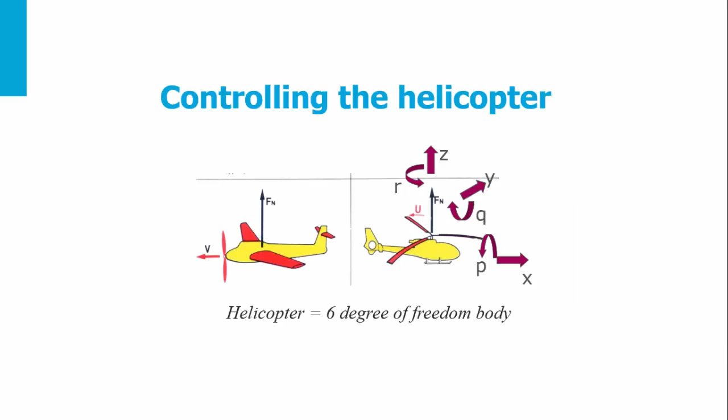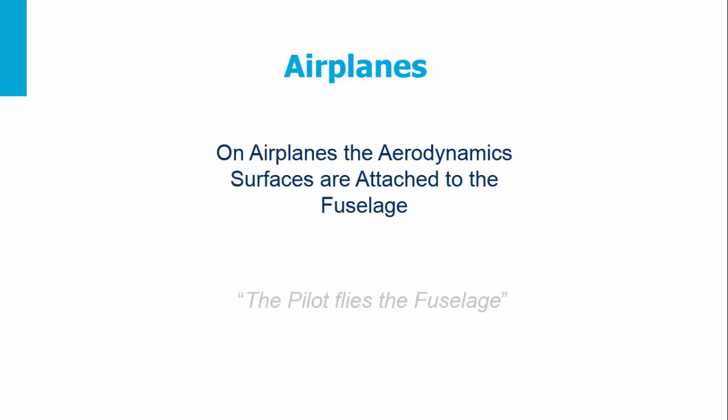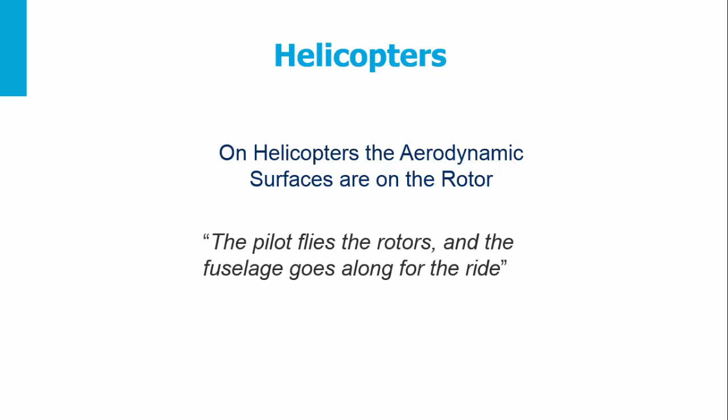Helicopter is a 6 degrees of freedom body and needs to be controlled in all its axes. On an airplane, the aerodynamic surfaces are attached to the fuselage, so the pilot flies the fuselage. In a helicopter, the aerodynamic surfaces are on the rotor. The pilot will fly the rotor and the fuselage will go along for the ride.

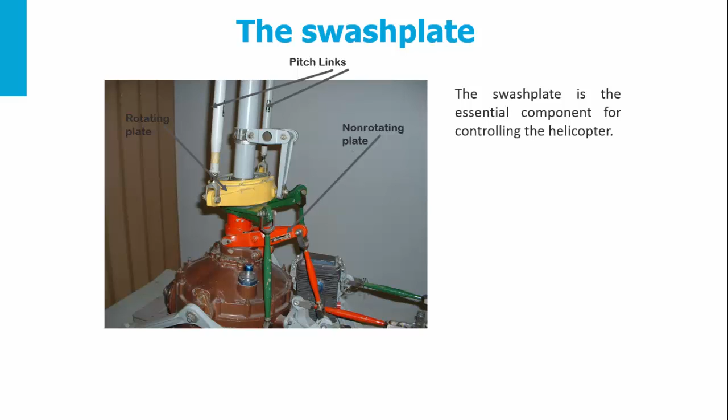The most important component of a helicopter rotor is the swash plate. The swash plate consists mainly of two parts: a non-rotating plate that you see in a figure and a rotating plate. This rotating plate is a control plate which not only slides along the rotor shaft but may move in all directions about its spherical bearing.

In a figure you see the pitch links which are connecting the rotating swash plate to the blade, or more exactly to the pitch horns.

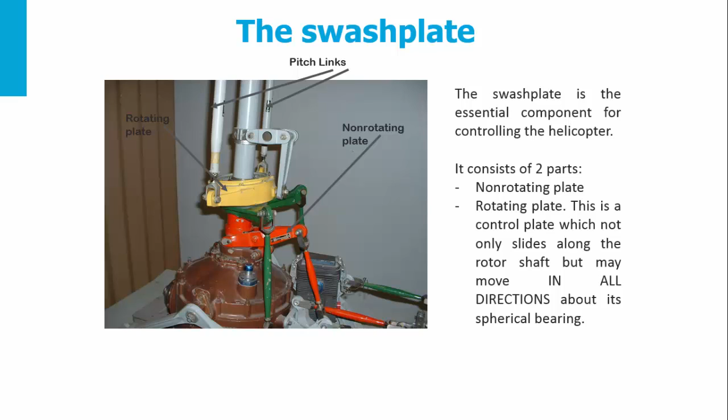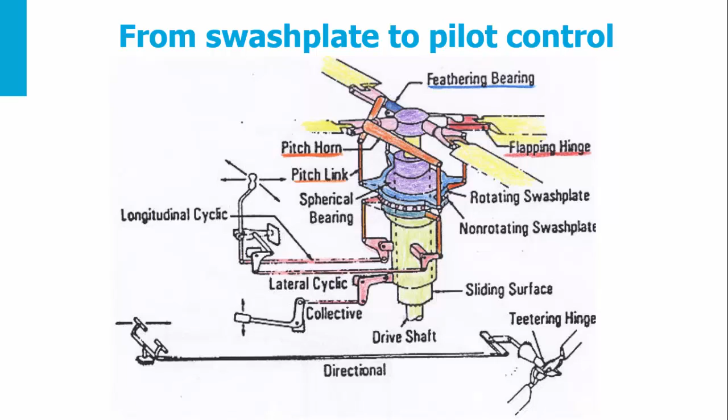In this figure you see how the pilot controls go to the swash plate mechanism. You see the helicopter pilot controls: collective, longitudinal cyclic, and the pedals, and all these going to the non-rotating swash plate and then transmitting the motion to the rotating swash plate.

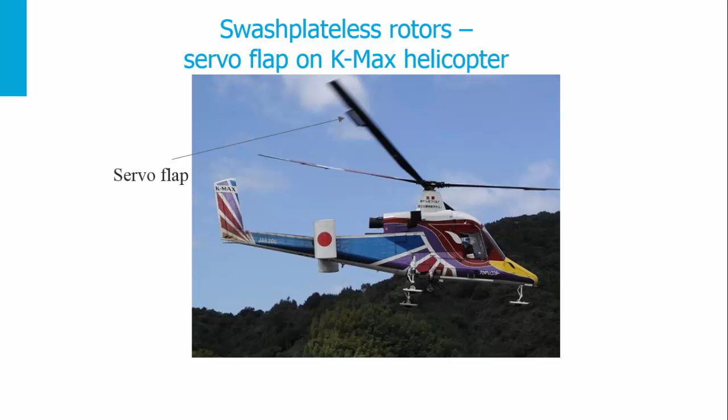Today, there also exist swash plateless rotors. Example, the K-MAX helicopter with servo flaps. A servo flap is a small airfoil located at about 75% span of the rotor blade, situated on the trailing edge of each rotor blade. These flaps are controlled by the pilot exactly like in fixed-wing airplanes. Moving the servo flap upward increases the rotor pitch and causes the helicopter to climb.

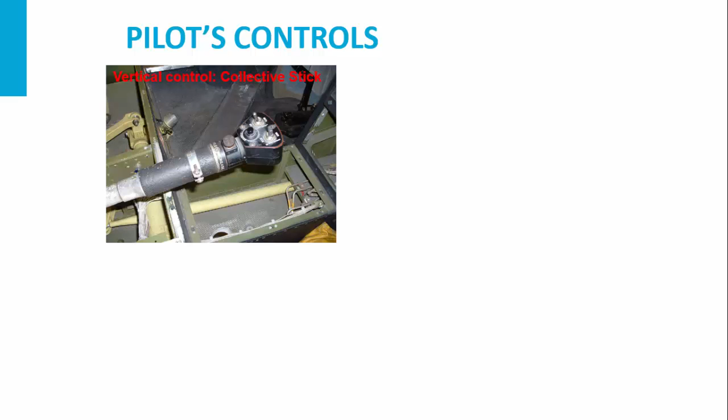We are going to discuss the pilot controls. The pilot controls are as follows. For the vertical control, we can use the collective stick. This is located on the left-hand side for a pilot seated on the right side. Sometimes the collective stick also controls the RPM of the rotor by a twist grip.

Then, the longitudinal and the lateral control is achieved by using the cyclic stick. This is positioned in front of the pilot and can be used to tilt the swash plate. The yawing control is achieved by the pedals.

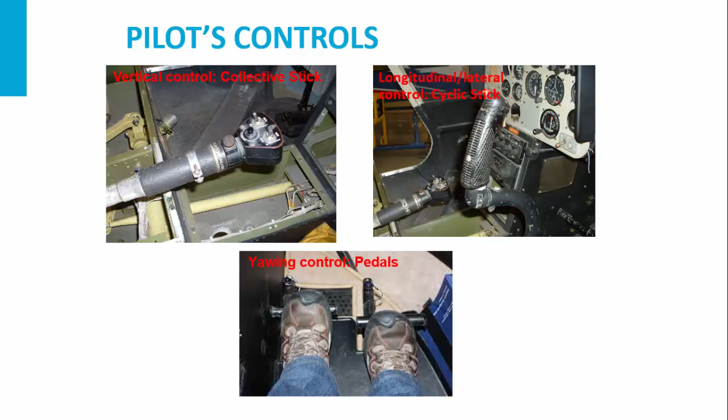Let's concentrate on each control. First, the collective stick. When the collective stick is applied by the pilot, it will result in the following: for 1 inch collective stick, the non-rotating swash plate will rise. This is connected to the rotating swash plate, which then is connected through the pitch links to the pitch horn.

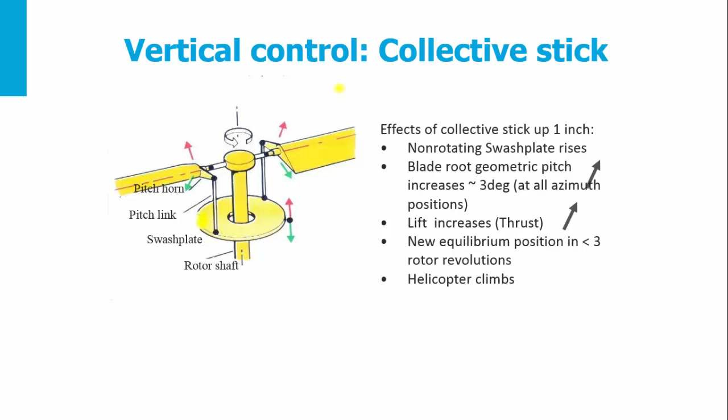As a result, the blade root geometric pitch will increase at all blade azimuth positions, approximately 3 degrees. The pitch is increasing, the angle of attack is increasing, the lift is increasing, so the thrust force on the whole rotor is increasing. A new equilibrium position is achieved in less than 3 rotor revolutions, and this results in a climb of the helicopter.

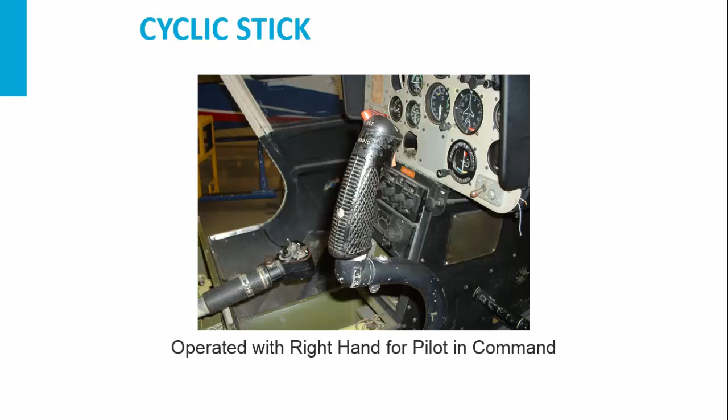The cyclic stick is operated with the right hand for pilot in command. When one is moving the longitudinal cyclic stick forward, the rotor disc will tilt forward, the thrust force will tilt forward, and the helicopter will pitch down and move forward.

Equivalently, for lateral control, the cyclic stick to the left will result in a helicopter rolling and moving to the left.

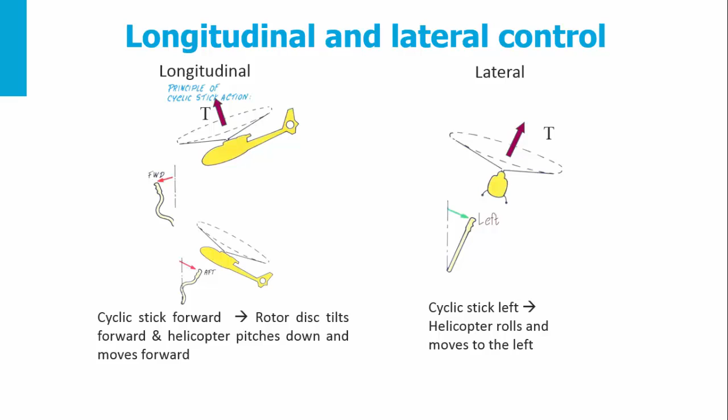What happens on the swash plate after giving a cyclic pitch? You see here the helicopter rotor and the different blade azimuths. For a cyclic stick forward, the non-rotating swash plate will tilt forward.

The pitch horn is connected to the advancing blade of the helicopter. The advancing blade is actually the blade which is situated at 90 degrees azimuth and is advancing with the rotor. As a result, the pitch angle on the advancing blade will decrease to a minimum. This will result in a decrease in the angle of attack and a decrease in the lift force.

Opposite, on the retreating blade, situated at a 270 degree azimuth angle going to the back of the helicopter, the pitch of the blade will increase. This results in an increase in the lift force. As a result, you would think the rotor disc will tilt laterally. But due to gyroscopic effects, as we apply a force on the rotor, we get the response 90 degrees later, resulting in a forward tilt of the rotor. As a result, the helicopter will pitch down and move forward.

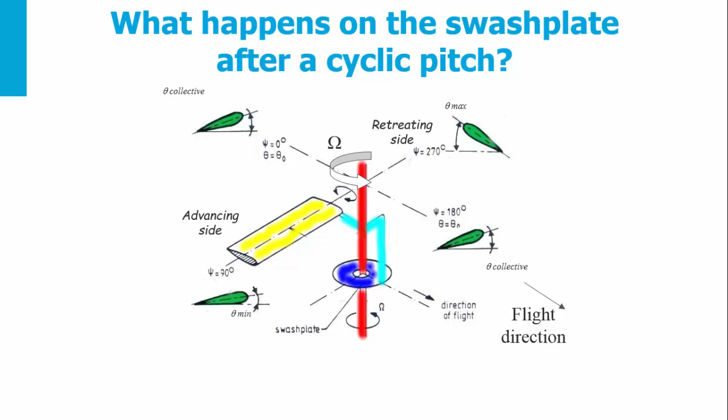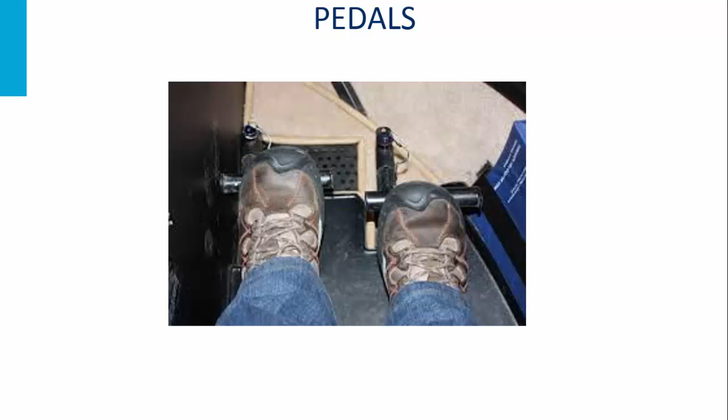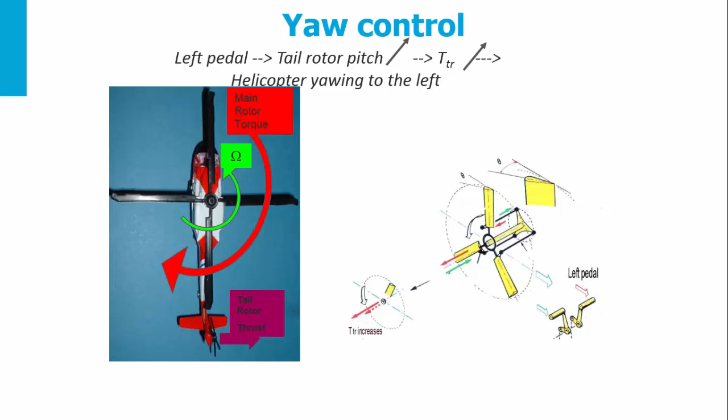Understanding this mechanism, we can go to the pedals. The pedals control the yaw. For example, if we give left pedal, the tail rotor pitch will increase, the thrust on the tail rotor will increase, and as a result, the helicopter will yaw to the left.

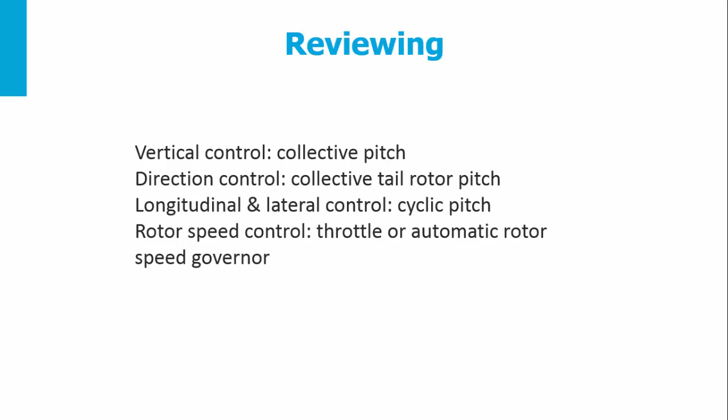Reviewing: vertical control is achieved with collective pitch. Directional control is achieved with tail rotor collective pitch. Longitudinal and lateral control is achieved by cyclic pitch. Rotor speed control is achieved through throttle or an automatic rotor speed governor.

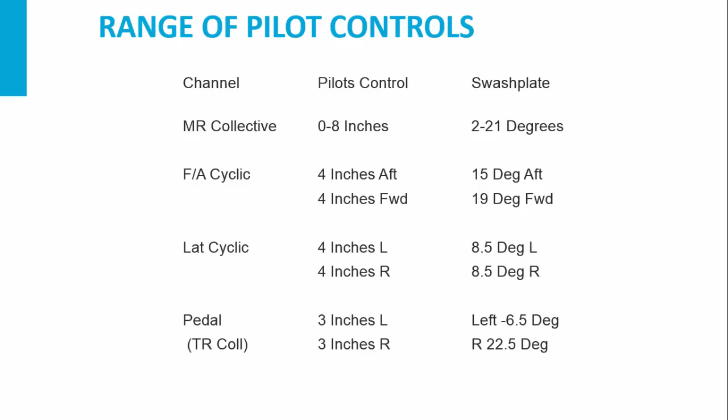The range of pilot controls are given in this table. Applying the collective main rotor, a 0 to 8 inch pilot control results in a swash plate pitch between 2 and 21 degrees. A cyclic forward-afterward of 4 inches results in 15 degrees aft and 19 degrees forward of the swash plate. A lateral cyclic of 4 inches left-right results in 8.5 degrees left-right. And for a pedal, 3 inches left-right results in 6.5 degrees to the left and 22.5 degrees to the right in a counter-rotating helicopter.

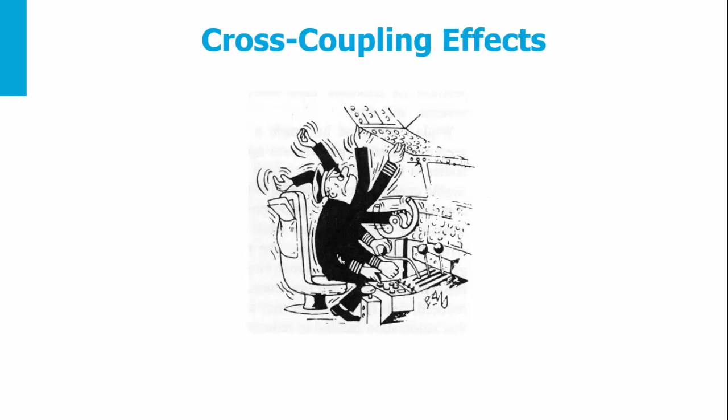There are many cross-coupling effects in helicopters. Some of the most important are presented here. First, collective is coupled to the yaw control. Why? Imagine the pilot is moving the collective lever. This causes a change in engine torque, which changes the reaction torque. Therefore, one needs to apply more pedal to prevent the helicopter from yawing.

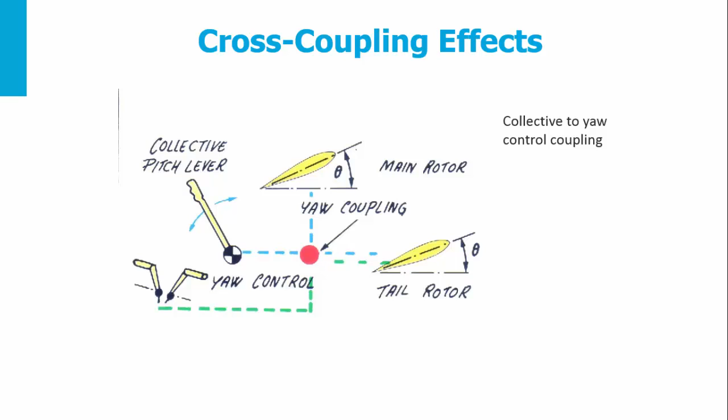Another cross-coupling is the lateral to collective pitch control. Imagine we apply a lateral cyclic stick. As a result, the lateral force on the main rotor will increase. Therefore, we need to apply more pedal in order to restore the lateral equilibrium of forces. Applying pedal results in a yaw unbalance, and this will again require collective stick.

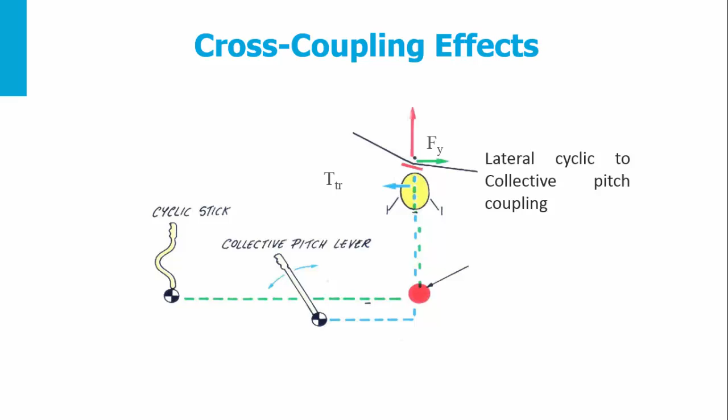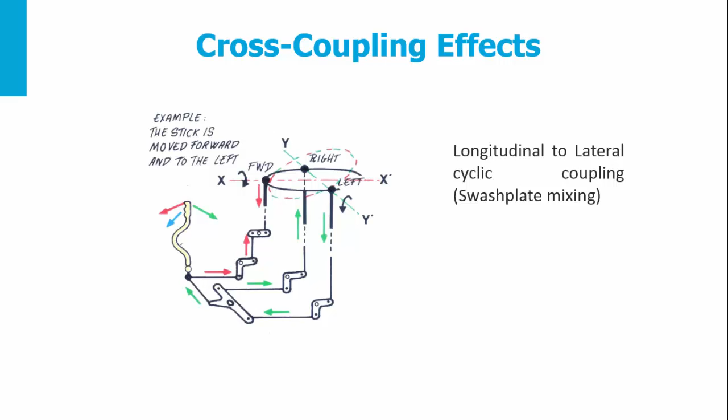Another cross-coupling effect is the longitudinal to lateral cyclic coupling, or swash plate mixing. Usually the longitudinal and lateral controls are designed as mixed controls in the swash plate mechanism. Typical control mixing: for a 1 inch collective stick pilot input, it results in 1.6 degrees main rotor collective pitch, 1.6 degrees tail rotor collective pitch, 0.46 degrees main rotor longitudinal cyclic, and 0.25 degrees lateral cyclic. Often, elevator incidence is linked to pilot collective and forward-afterward cyclic pitch.

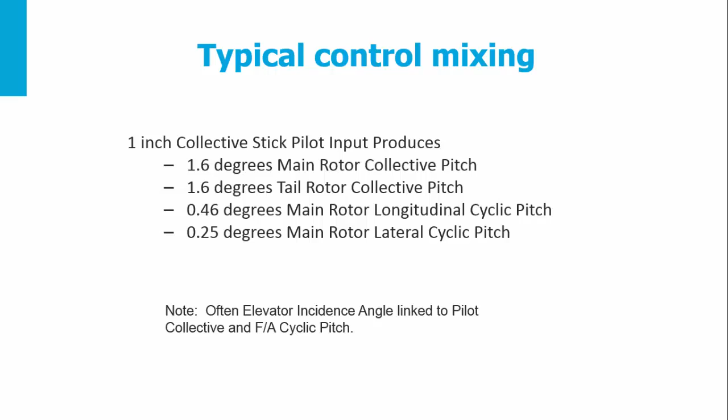Imagine now we would like to accelerate the helicopter from hover to forward flight. As a pilot, we need to do the following: pull the cyclic stick forward so the rotor disc tilts forward. Then apply collective - first raise it to keep altitude, then lower it because as the helicopter accelerates it needs less power. Once we lower the collective, we need to apply right pedal in a counter-rotating helicopter. Right pedal means moving the cyclic to the left, in order to keep the attitude.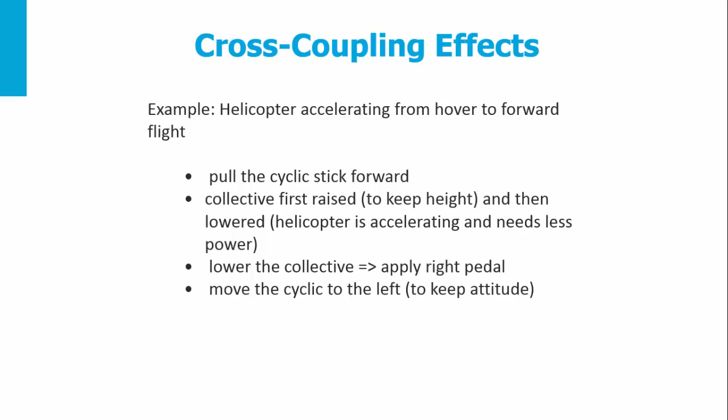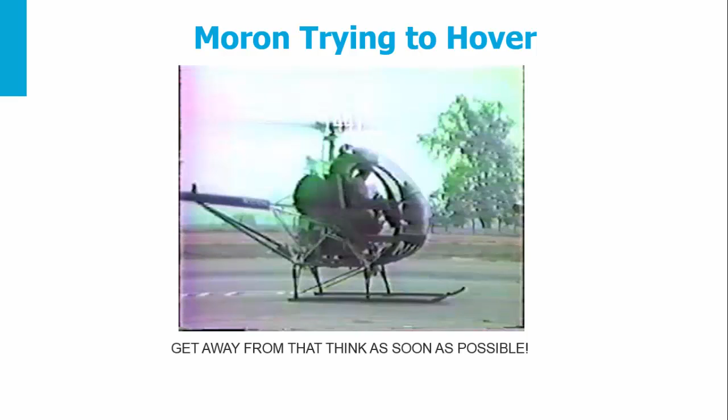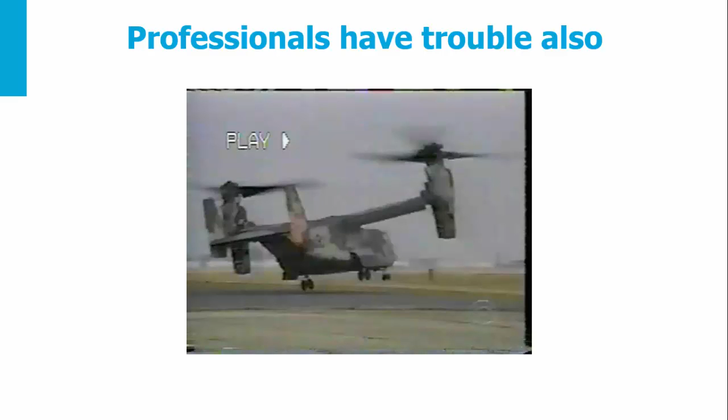Concluding, the helicopter is a cross-coupled vehicle with much workload for the pilot. I attached to this lecture two movies: a moron trying to hover, showing how difficult it is to take off with a helicopter if you do not know how to fly, and a video of the V-22 tilt rotor in a pilot-induced oscillation. Both show that helicopters are difficult to fly. I end the present lecture on helicopter controls.